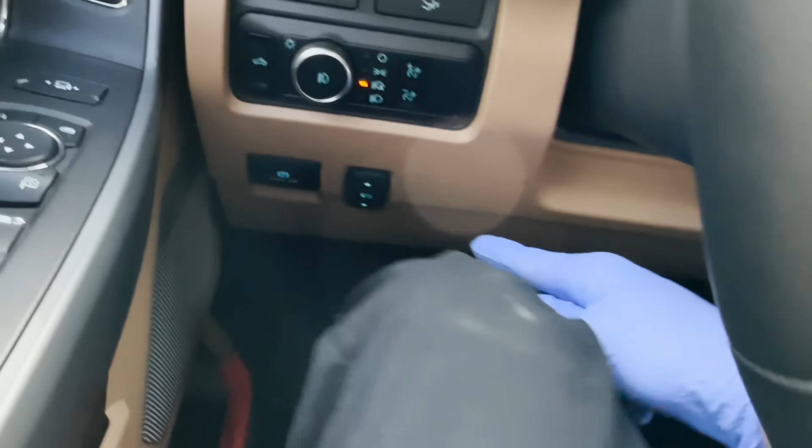Finally have the BD kit for our 6.7s in the 23 model year, and I'm excited because a lot of guys have been asking how do we do this, can you show us? Well, BD Diesel has finally came out with the kit. I'm going to show you guys how to install it. It's going to be similar to where we have the other ones located for the steel bodies and the Alumaduties.

But first, gotta love repeat customers when they come back on time. Look at that, just 300 miles over. No big deal. I'm going to bust out this maintenance and then I am going to get back on the video.

I can't get over that heads up display. That is pretty freaking sweet. I do think that's pretty cool. Another something to break, but that's pretty cool.

Maintenance completed. The works and fuel filters, 10,000 mile maintenance. No big deal, but what we are going to be installing, like I was explaining in the beginning, is the BD Diesel High Idle Kit.

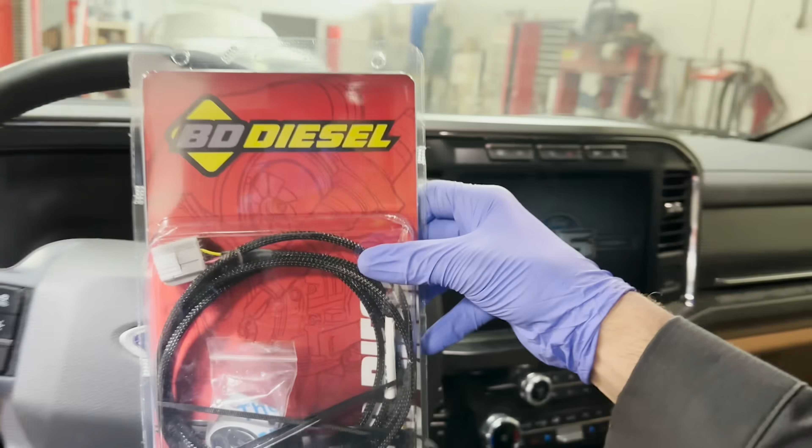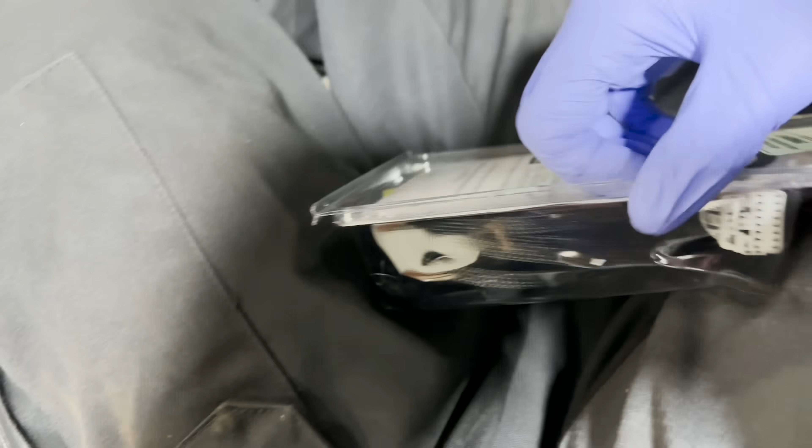So let's see if we can get past this. I saw something on TikTok, a guy was using a can opener to open these child-proof packages. All right, let's do some unconventional cutting. Let's try not to get my paws dirty. I didn't want to get this guy's truck all nasty.

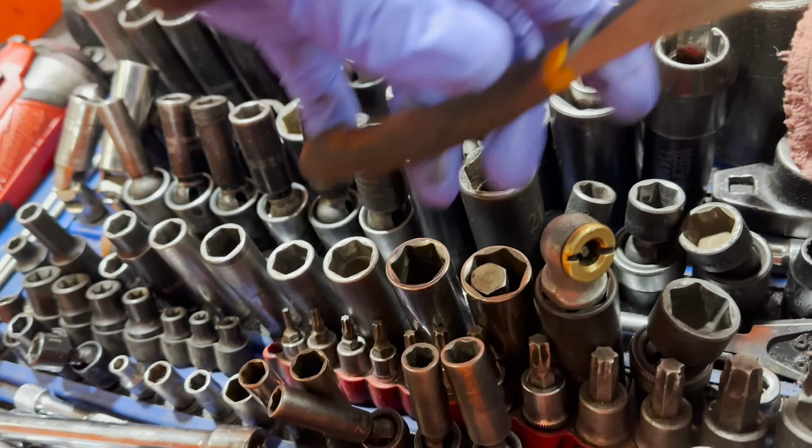So we got one. Let's see if we can muscle our way out of here. I didn't cut myself, so that's good.

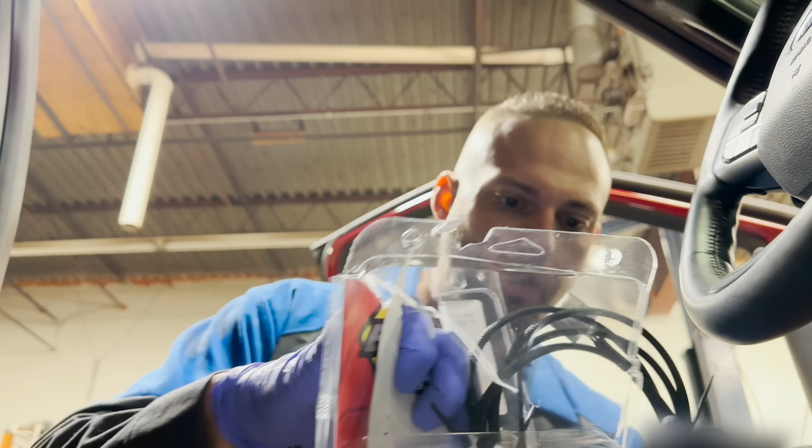Remember when we would get toys when we were little and I just want to play with them, just tear all this stuff apart. Okay, oops, whoopsie daisy. Alright, got some zippy doodads. We don't need this packaging anymore.

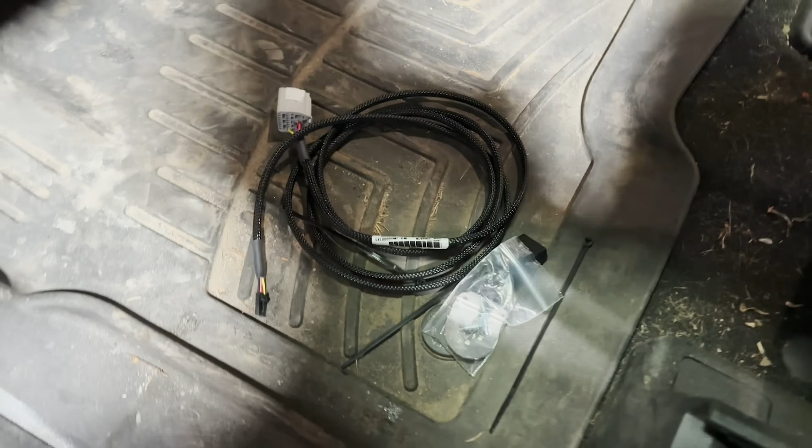Alright, so this is what you get in the kit: the high idle switch, wiring, doodad, look at that, factory ASF. We have the mounting plate, and we have the switch.

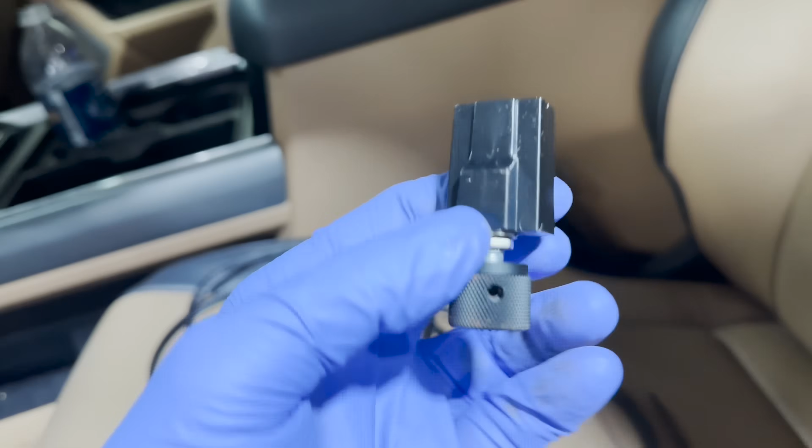And you guys are going to need an 1/8 inch size Allen to get that small set screw out, which I am going to need to find because I thought I had one.

This little bit set isn't going to go deep enough. 1/8? Nope. Oh, maybe it was a 1/16. I'm a stupid.

I don't know if this was going to go in. Is it? Oh, I guess so. Right there, a little bit driver. Okay, no big deal, 1/16 size.

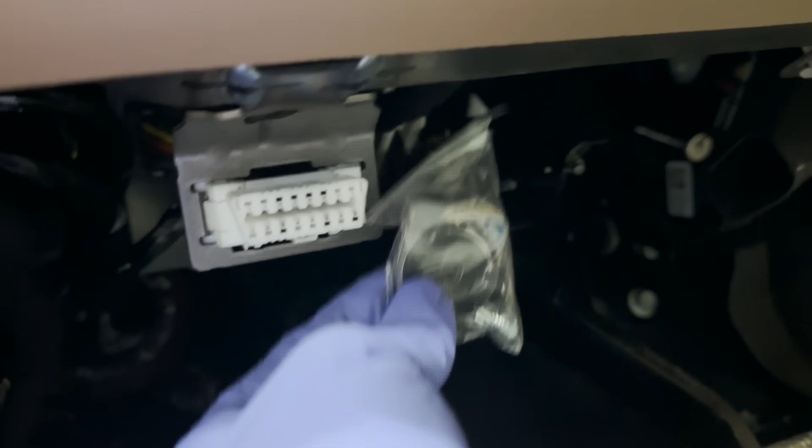We got any screws holding this on like we did? Did we? Are we? No, I think it's just a piece of metal. All right, well, we're gonna find a different location because I really don't want to drill into my man's stuff over here. So here are the instructions.

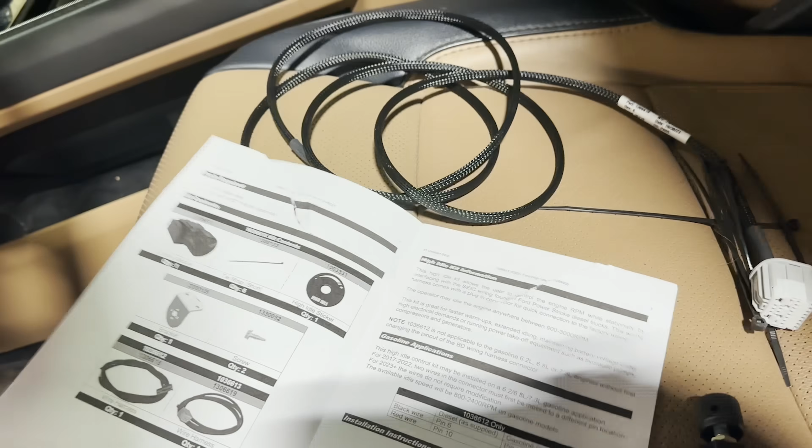No, we are not doing gasolina, we're doing the diesel. Pull off the access panel, and then we are going to disconnect the OEM upfitter wire pigtail.

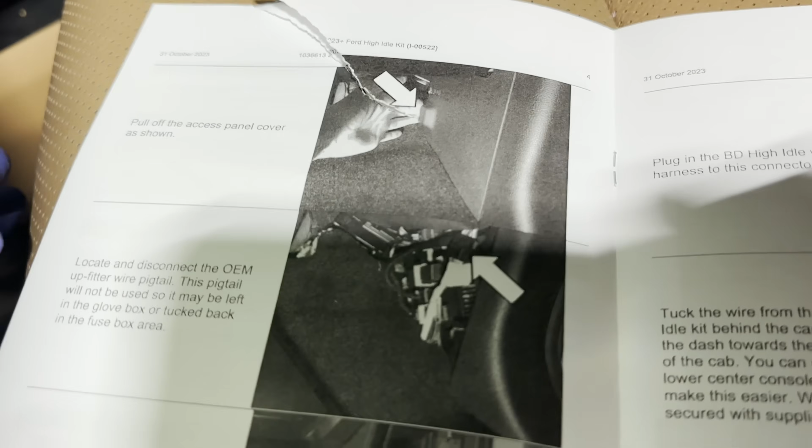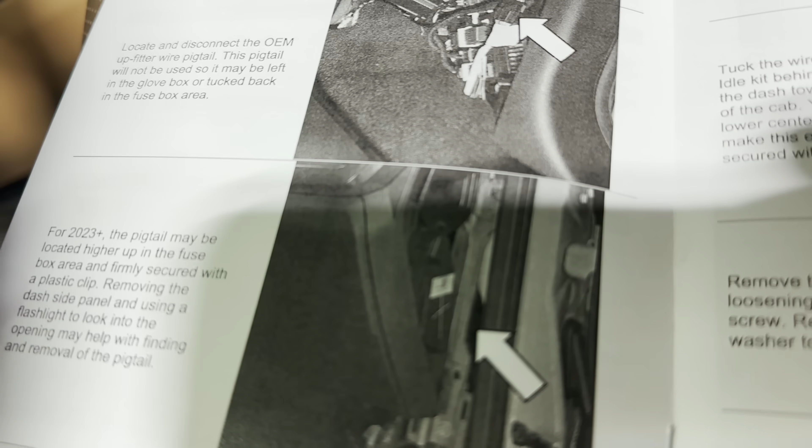So if you guys recognize that, for 2023 the pigtail might be located higher up in the fuse box area and firmly secured with a plastic clip. Remove the dash side panel and use a flashlight to look into the opening, and you might find it down here in this crevasse. Plug in the wiring, tuck the wire behind the carpet and the panel, and then it said right there, 1/16 Allen set screw.

So let's go over here to the passenger side of the truck and let's pull off this panel we got over here. We need some illuminations.

Let's get this scuzzy out of here. Scuzzy Wuzzy was a bear. Scuzzy Wuzzy, get this stuff out of here. Okay.

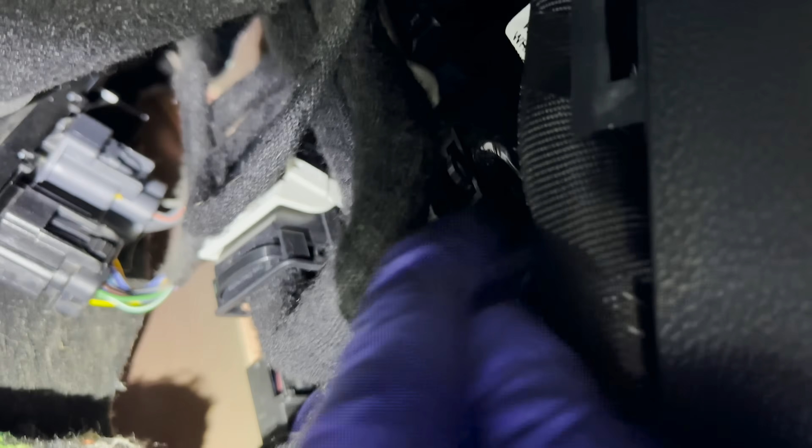Alright, pulling it off. I don't immediately see what they were talking about, so they said it could be higher up. Now we have had this dash panel out before.

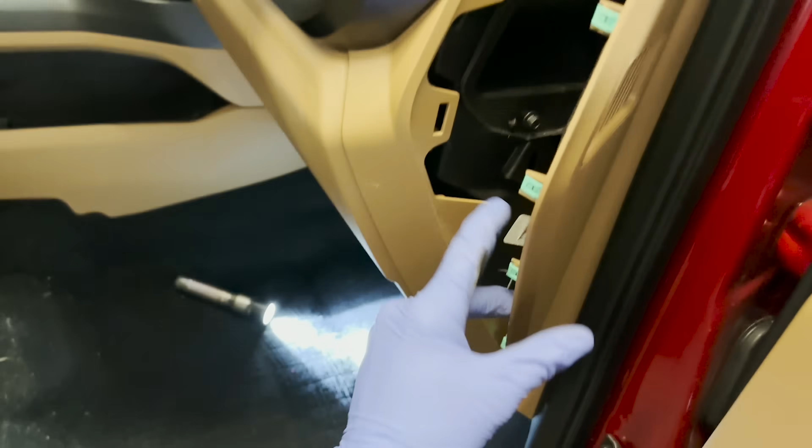So it has came apart, one more clip right there. Okay, so they were actually talking about it being tucked up further into this area. Or how about we take off this piece, give us a little more.

Ooh, could that have been from moi? Very possible. Let's see, actually, it could have been somebody else.

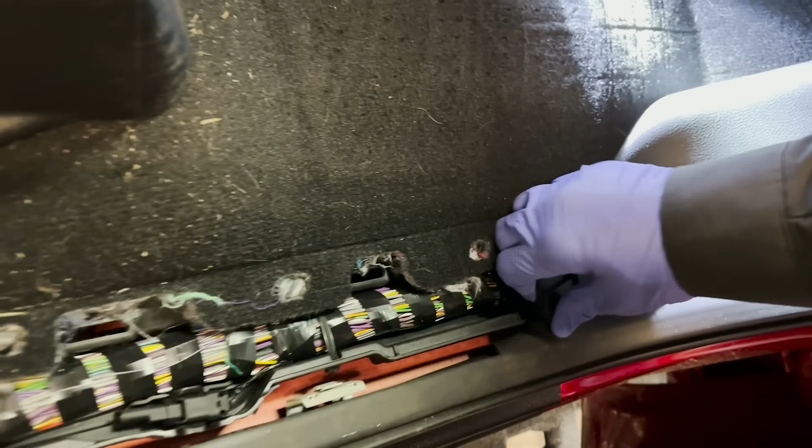Why isn't this not coming up? All right, make sure when you take these off that you watch out for this little pin right here. The other trucks have a little locating tab. Okay, so we're gonna be looking for that connector that is supposed to be just chilling here.

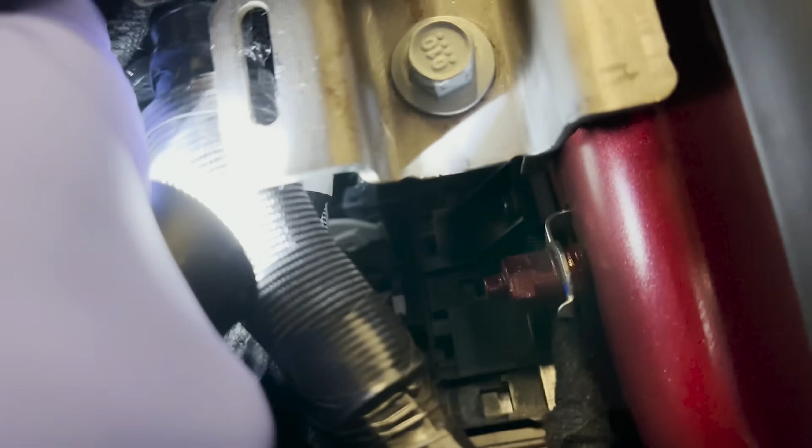Chilling somewhere, chilling like a villain. I don't know where it's at yet. I don't see it. The instructions are not updated in the packaging.

So I had to go to their website and found the latest instructions. You would not believe where Ford puts the other end of this thing. Come and take a little look with me here. Okay, here we are, going up into the body.

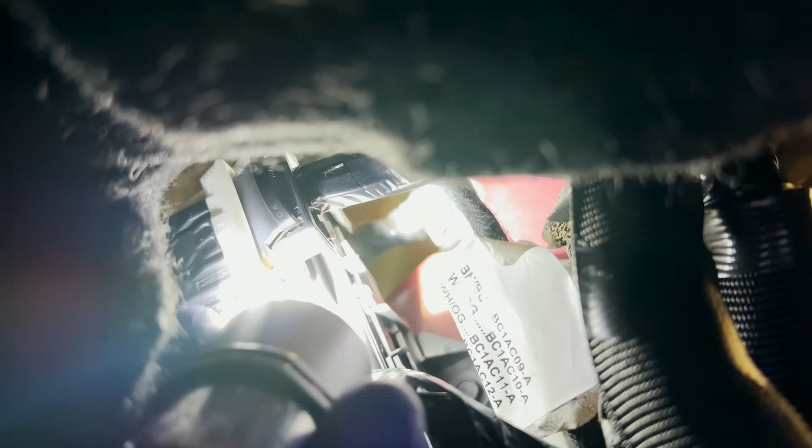You see that gray connector right there? I can't point to it. Right through that hole in the body, it's underneath a harness. See it? Let me get the light off of it.

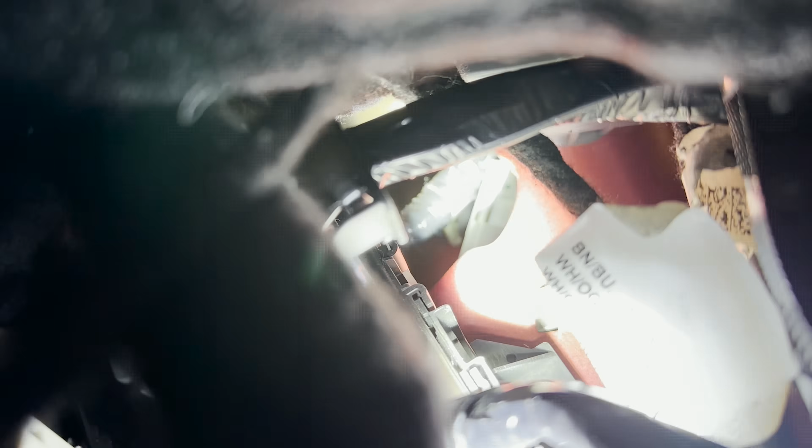That gray connector, that's in there. Let me see if I can zoom in so you can see the clip. It's... no, where'd it go? It's held in by a clip right there.

But it is going to be kind of a pain in the butt to get out. I'm gonna have to do some rigmarole to get that out. Apparently there's some wires, just whole dangly ones, a whole shoebox full of dangly ones.

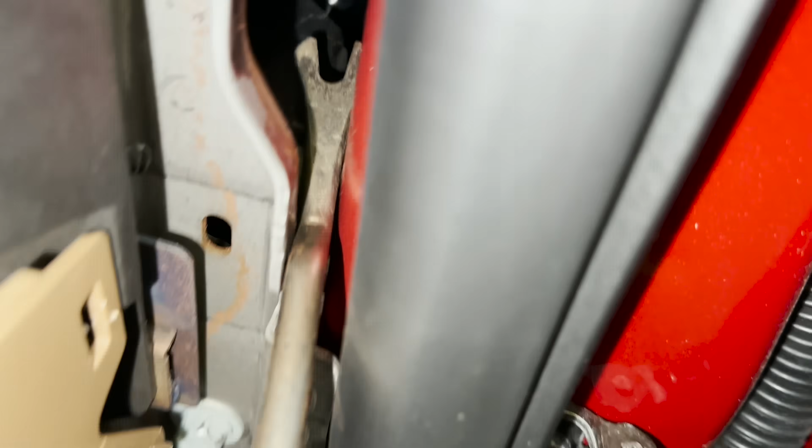All right, I went and got my trim tool, and I am finding a loop of wire right here that's actually going down into this piece right here, into the body. So what I'm doing is kind of pulling up, trying to work it out of this cavity here.

Oh, see that gray connector? It's coming out. Got a bunch of wires, I guess.

They were not joking, this really is a pain in the butt. There it is right there.

There we go, look at that. I freaking got it.

Now, the question is, how am I gonna facilitate? Oh, can I put my hand in? Oh my goodness. Oh, I forgot it's got a twang to it. Oh my God, why would they do this?

Okay, so that's the connector, I found it. Now it's trying to get this untwanged from the harness. This is just freaking stupid. Stupid all the way around. Like, this is the dumbest.

I would have had this whole job done if it hadn't have been for this bloody connector that I literally can't even pull out of here. Wow, oh my gosh. Come on, goodness gracious, man.

These freaking Ford engineers are, every last one of them, I have nothing good to say about them. And that's not what this channel is about. But Jesus, get your head out of your ass.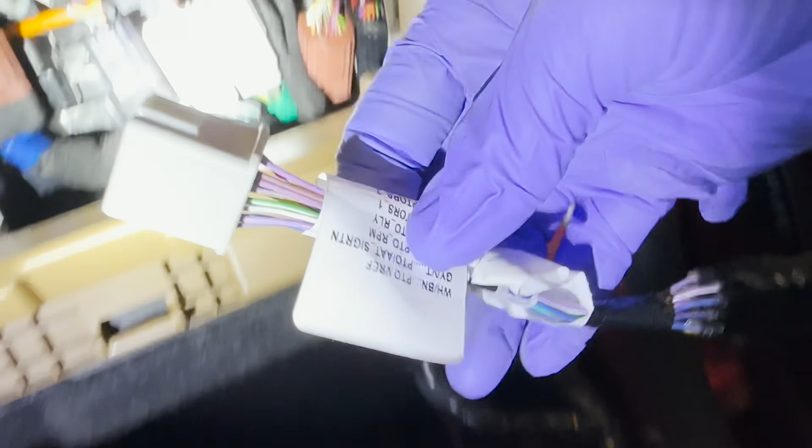So, once you get to this, you'll be able to install this nice beady harness right there. See, that's where they go. What a pain in the butt. I can't believe that's where they stuck that.

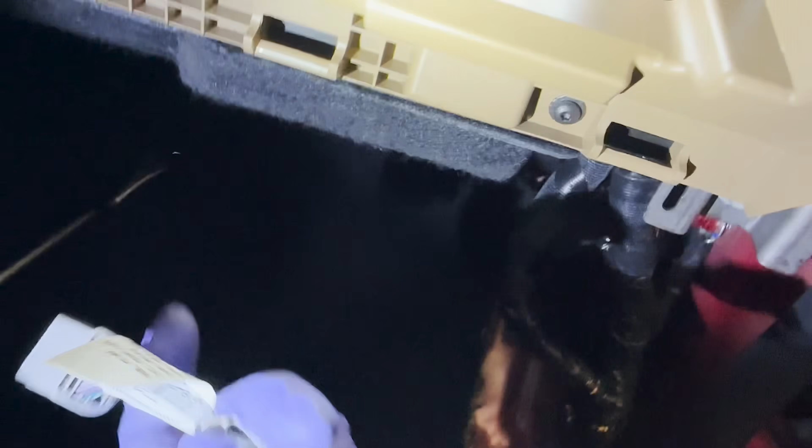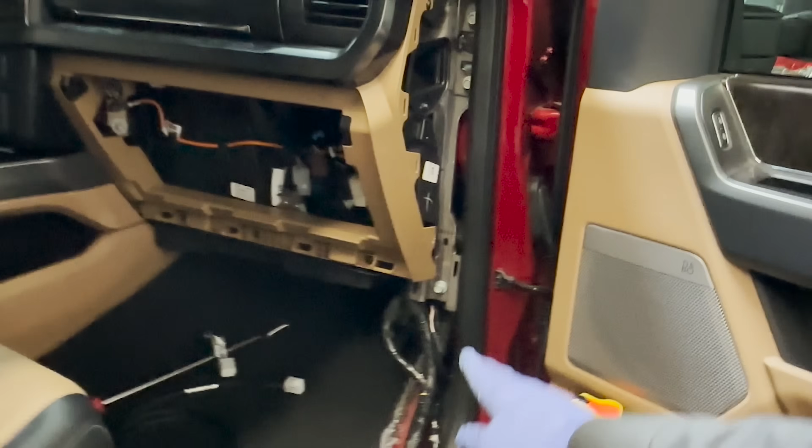Now, what we need to do is I'm gonna grab my little claw tool from the driver's side, and I'm going to feed this end across the dash, across the waterway, and we're gonna run the wire up here and fully connect this to the newly found Ford harness.

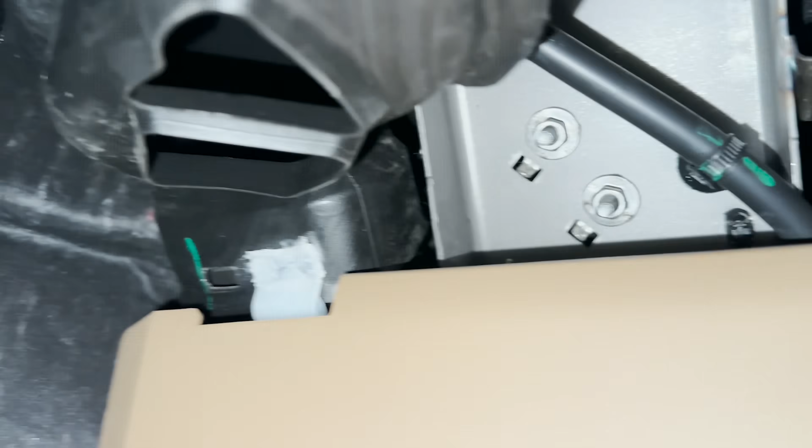All right, so like I was explaining to you, we're going to facilitate this, we're going to facilitate that harness through. I'm going to try to go like maybe right through here, or I could go back behind that.

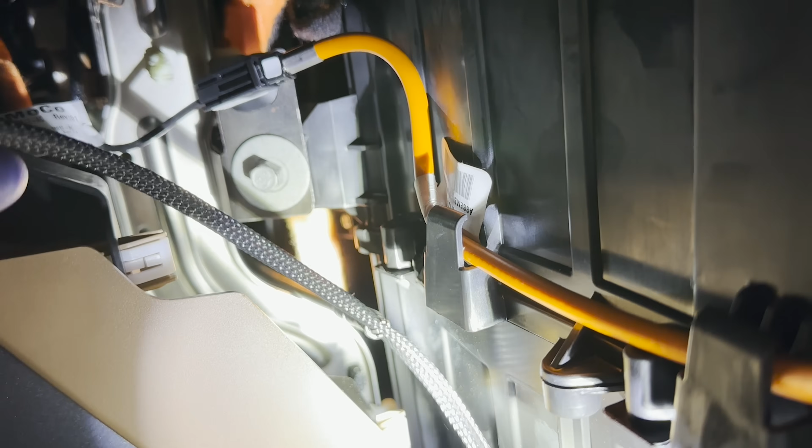The claw has already come through. I wound up dropping the glove box down - it was super easy. Those two things pop out right here, and then they just have some feet sitting right here. That gave me way more room. You can see I went through the driver's side first, and I hooked my cable up, and I'm gonna pull this all the way through.

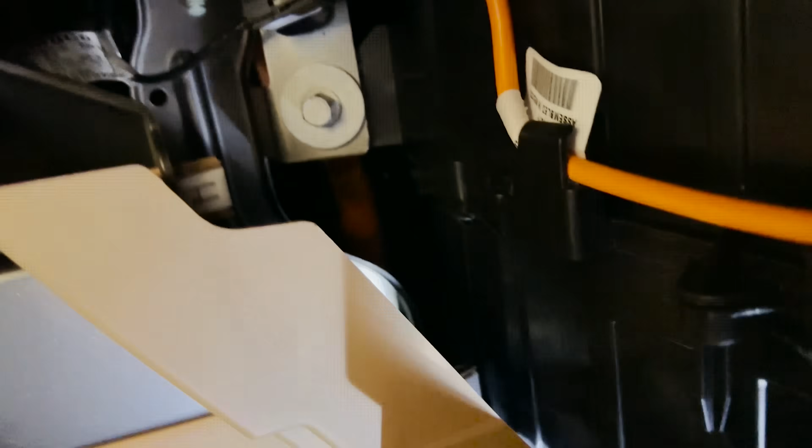We're gonna go nice and slow, still connected, and I'm just gonna feed this all the way back behind the dash. There goes my cable - did it come off? Oh, it came off. Well, you gotta repeat that until you get that all the way through. Here it is, let's go ahead and put this away.

We're gonna leave that like that, and I suppose we probably should plug in and put away all the electrical panels, or trim pieces rather. There it is. See if I can illuminate this a different way for all of us to see. There we go, got some light on it.

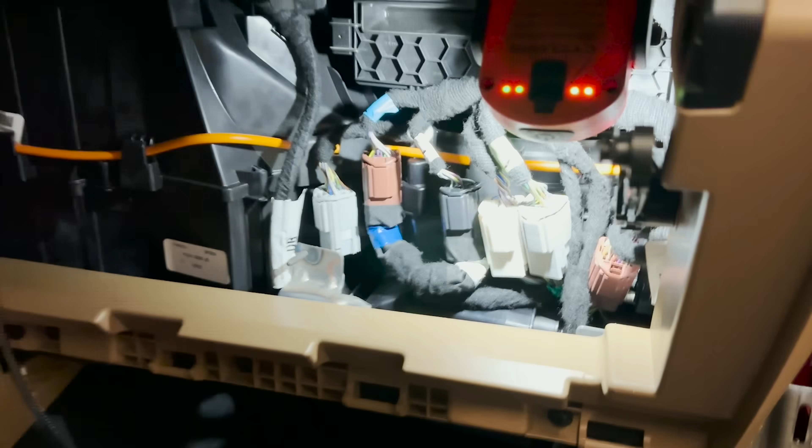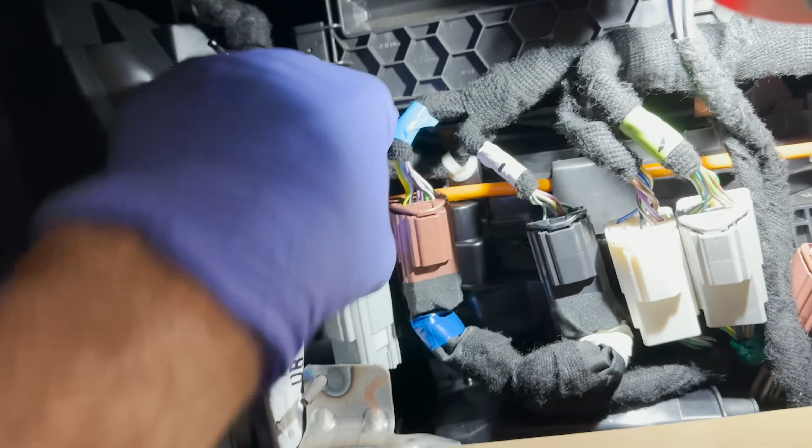Okay, so I am going to route this in a fashion that looks most OE. I'm gonna go around or behind all these other connectors like this, and I'm gonna go underneath this one. I suppose you could disconnect them, but some folk don't like that. I'm gonna keep going behind it, going behind it - let's get some slack.

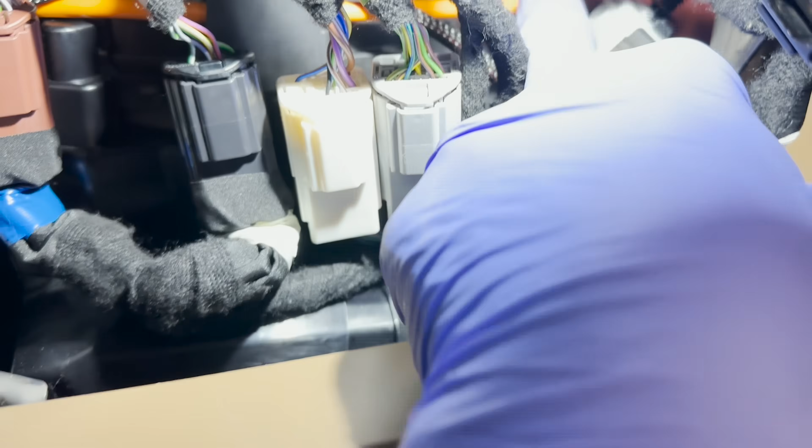How are we sitting for this connector right here? I see it, look at it - it's just chilling. So we're gonna have to go like this. Let's see if we can do this one-handed.

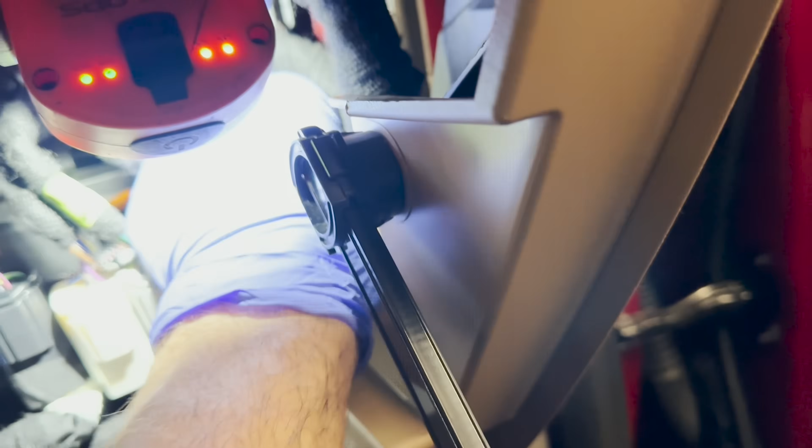Okay, like that. And we have a couple of holes here in the case. Let's see if I can pop this in the hole. Where is the hole? Right there. Look how factory that looks. We'll put the antenna right behind it.

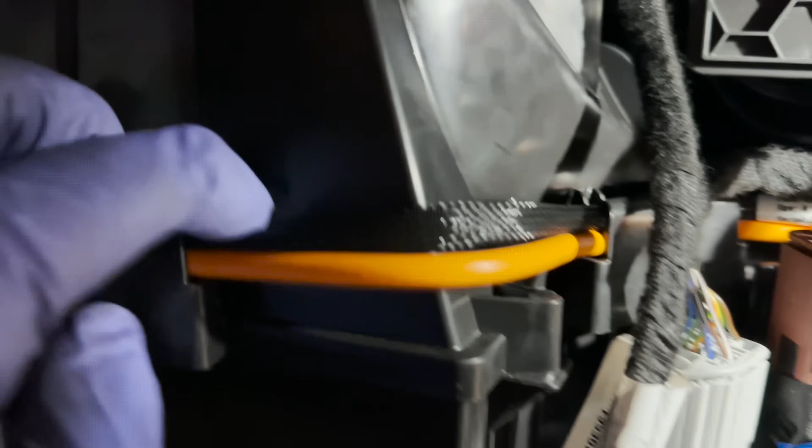That looks good, I like it. Maybe take this and tuck that - ooh, that's super factory. Do the same thing for this side. I like it a lot. I'm gonna keep going with it. I'm gonna put one in this, and I'm gonna put one in here, and I'm gonna put one in here. Actually, you know what I wanna do is, let's take this off.

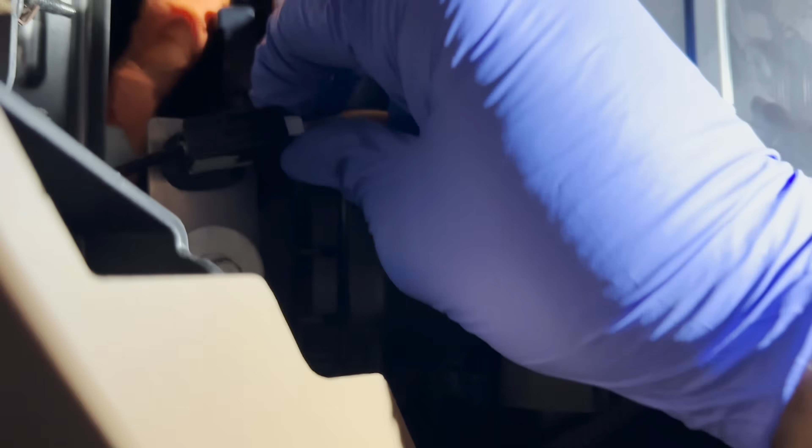Give a little connection - no, I think I need two hands. Yep, I needed two hands. I'm gonna go around this so it can kind of hold it into place. Now this was the antenna cable, I had to push this button right here. You can see the tabs springing back, but I like the way that's in here.

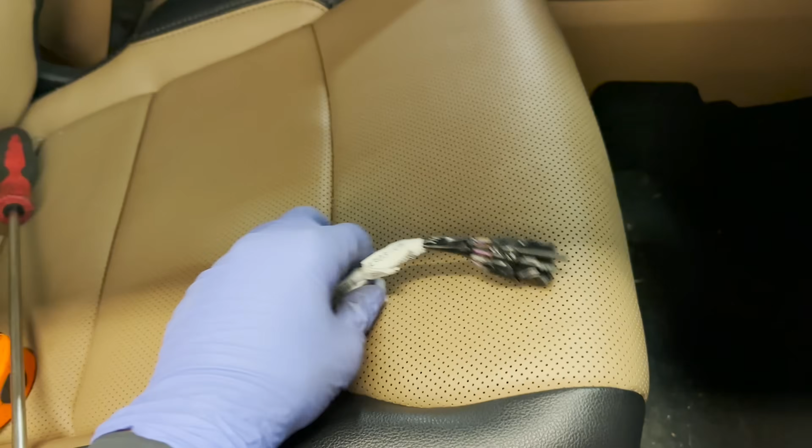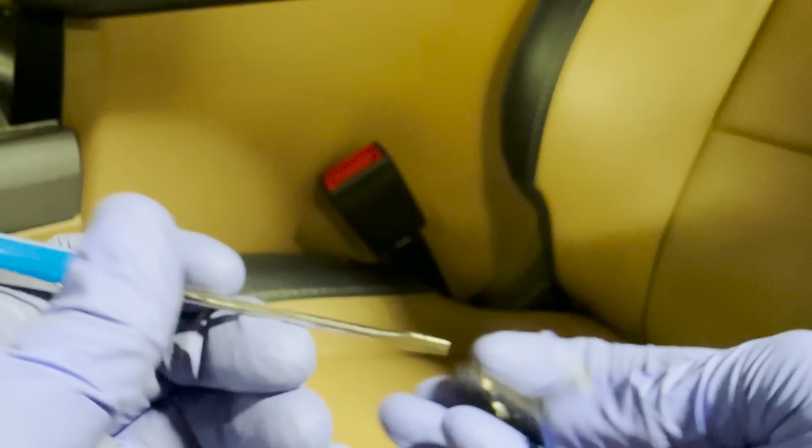Get your little bracket, and hopefully you have picked up one of our pocket screwdrivers - focus, it's got my little mug on there. Yeah, so get that, you're gonna peel off this little protective film that they leave on here.

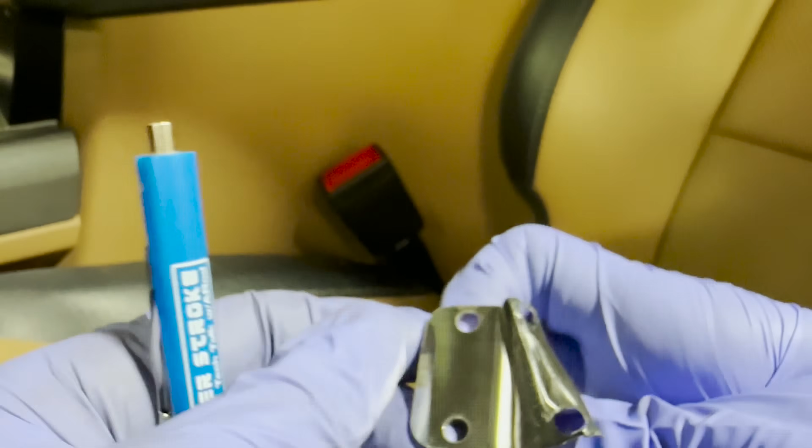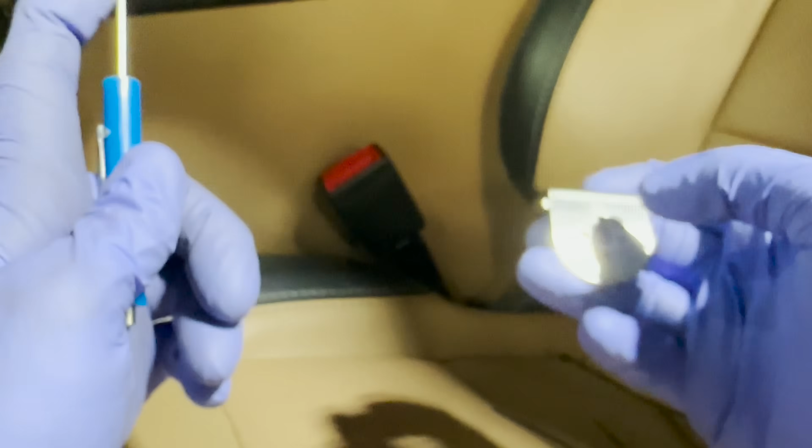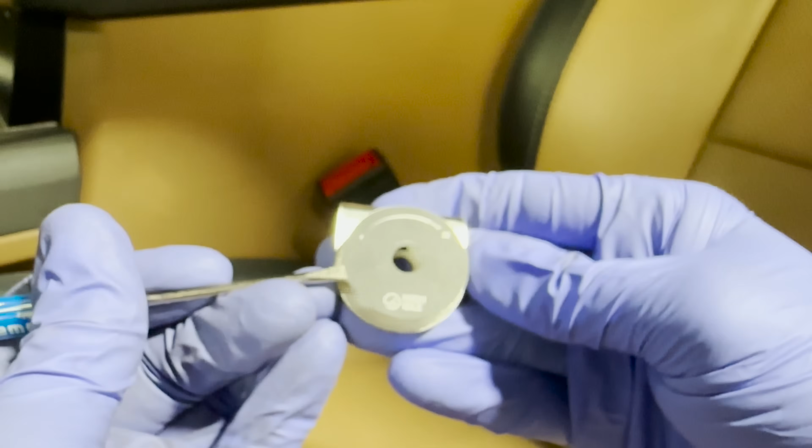Nice piece of metal. All right, and then they give you a little circular disc that has a plus and a minus on it, and this is going to be referencing the RPM level that you're going to set it at, because we're going to be at 800 to 3000 RPM. So we're going to put this thing right there - I like it perfectly in the middle.

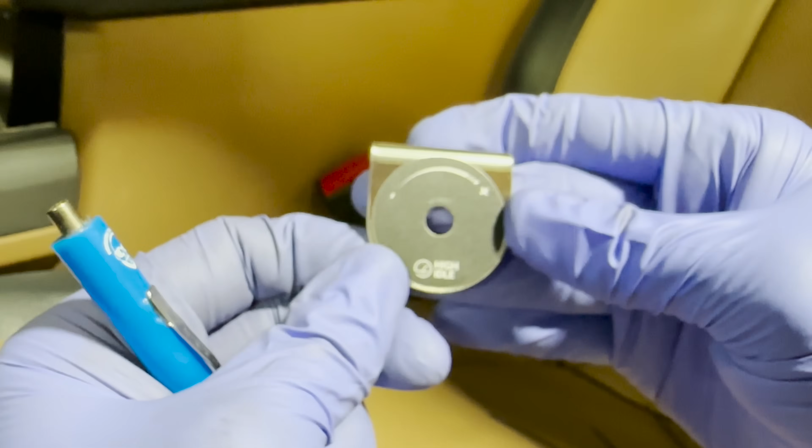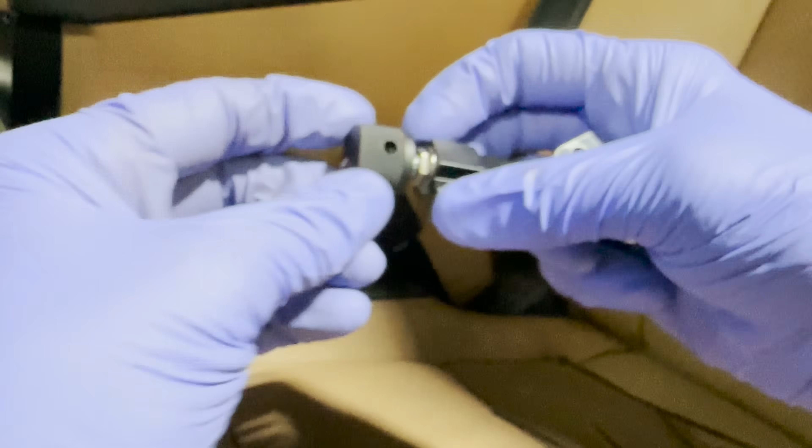I love it, okay so this is a really good mounting bracket for your switch. Now I was telling you about the 1/16 size Allen you're gonna need, and it's gonna be sitting in here. Let's see - that's off, that's on, so off it's sitting here like this. As soon as it unclicks, that's 800, then all the way to 3000.

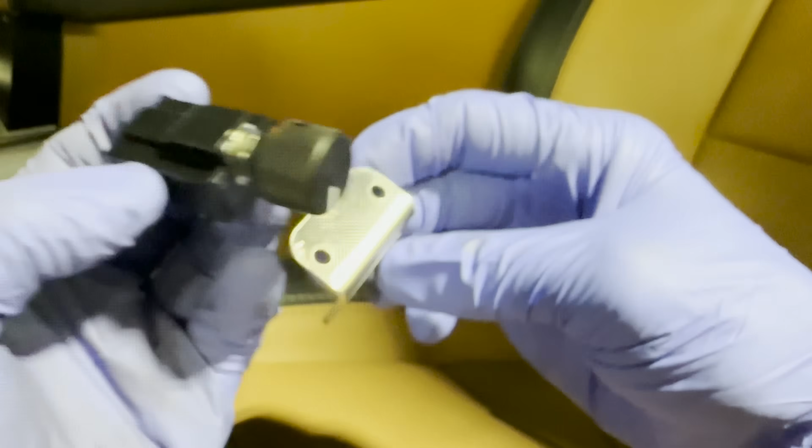So we have a little nut that is going to allow us to fasten the box to this, and then that's it. So really, right now, what you can do - we're gonna have to zip tie some of the wiring out of the way. They want you to drill and put the switch right there, but the last, I don't know, dozen or so that I've done, I have not put it there.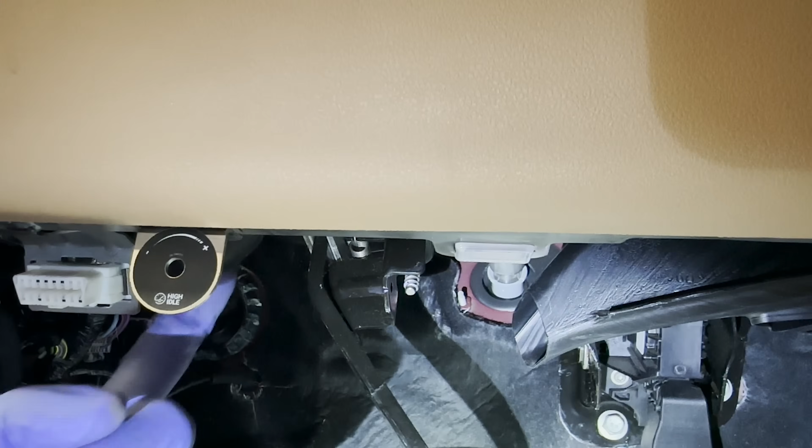So I'm using the flat of the bracket here against the flat of this metal, and it's completely straight. I'll just put the first hole wherever I want, then make the second one nice and flush and straight, and put my other bolt through.

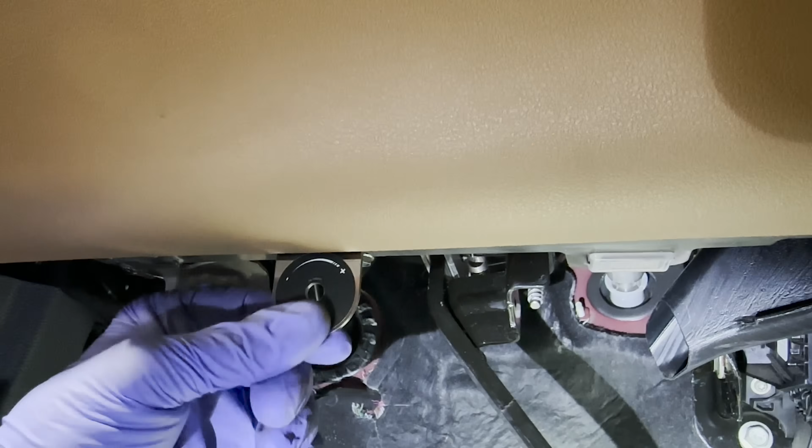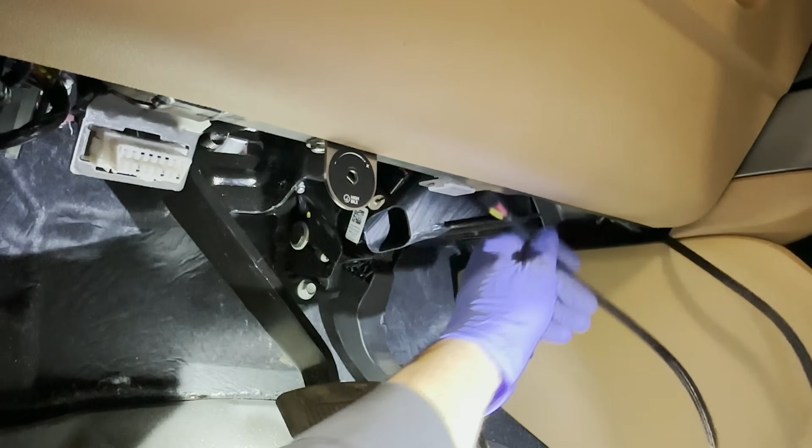There we go, that is sweet. Now we take our cabling. We're just gonna take the excess cable and go straight across behind this light, threading it through. Nothing hanging - we don't want anything next to any movable parts. So since we got it mounted, I'm gonna go ahead and plug in the switch.

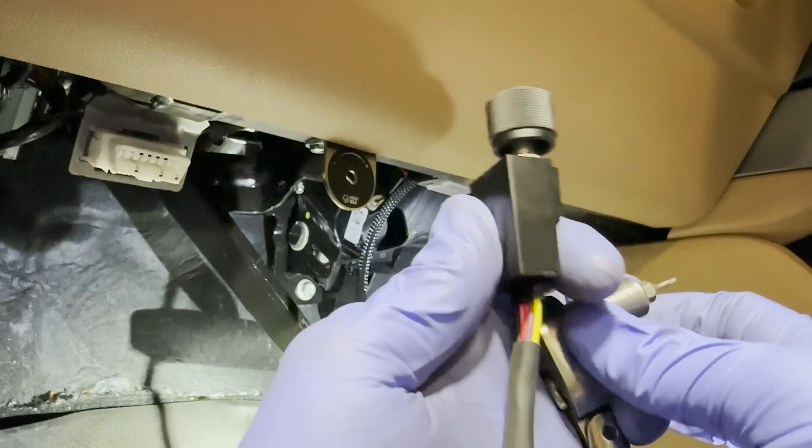Okay, we are in. Take our 16th size Allen. There it is. Release. Why isn't this coming out? Whatever, I'll just leave it in there. I'll wind up losing it. All right, little nut right here.

This is how it has to go into the bracket. Put it through. Oh, had a washer too - take the washer off, then we're gonna put it all the way through, and put the washer on, and then I'm gonna put the nut on.

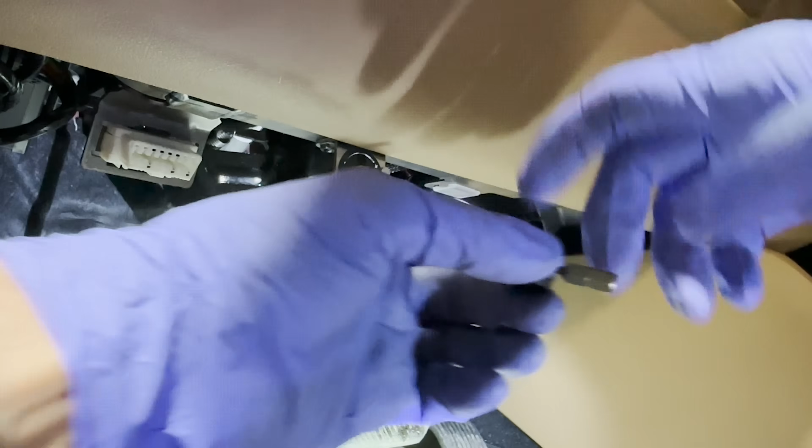We do a little tighten. Get it snug down, make sure the base is sitting nice and straight. Give it one more little snug. All right, so now the set screw has to go on that flat, so make sure you turn it so you can get to your tool for the set screw. Come on, go on the flat. Oh, I screwed it in too far.

Okay, knob going on, set screw setting to the flat. Let's make sure it goes off. Yep, on, off. All right, I'm just gonna go back to the bottom and do a little snug. It's small, so be careful - I don't want you to break it off in there.

That's complete. Now all you guys need to do is just tuck this wiring up in here and we are going to zip tie it to some non-moving parts and keep this as factory looking as possible.

I hate working underneath dashes, but this is the moment of truth. It's all hooked up. Key on, truck is started.

Instantly the RPM came up. Now, if we were to put our foot on the brake, the idle is going to go down, but we would have to do that to take off our emergency brake. So right now we have nothing - go put the emergency brake on.

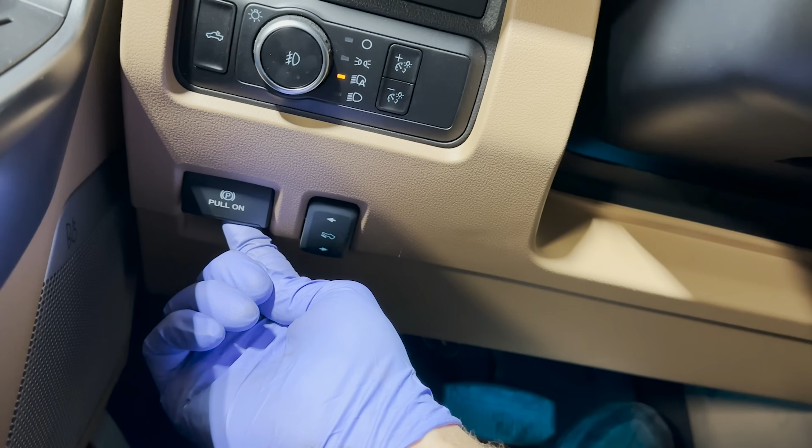Here goes our high idle. The requirement is for that parking brake to be set. And the farther we turn our switch, the more RPM we get - no foot on the accelerator. Check it out, that's all the way. And we're gonna shut it all the way back down before it revs up and runs away.

That, my friends, is the high idle kit from BD Diesel, supplied by hilldiesel.com. I will put his info in the description.